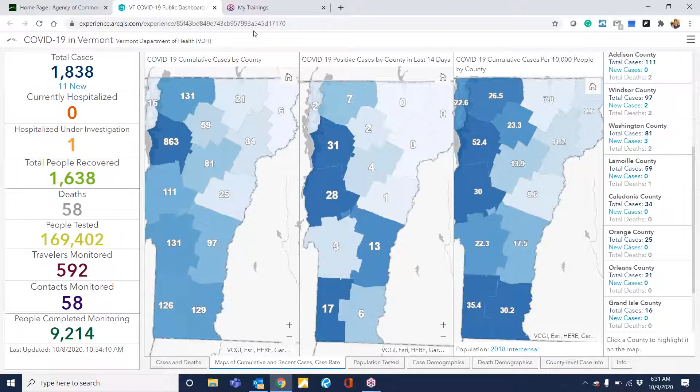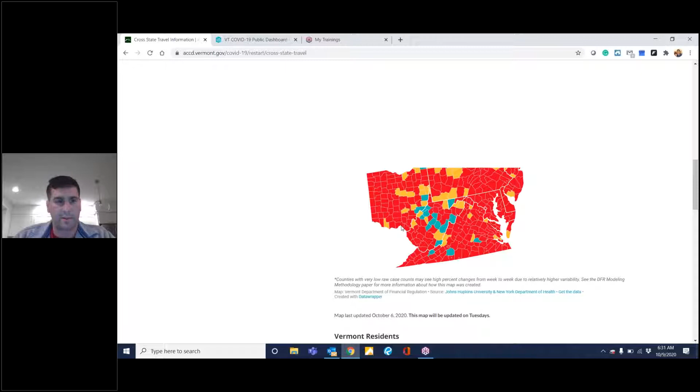The most up-to-date travel restrictions. This loads up real quick. There hasn't been a whole lot of new changes on Tuesday. Here's the map as it's loading up kind of slow. We'll move it over, but for the most part, regarding any leisurely travel coming up, please let your supervisor know so we are well coordinated and can have a quick discussion on expectations.

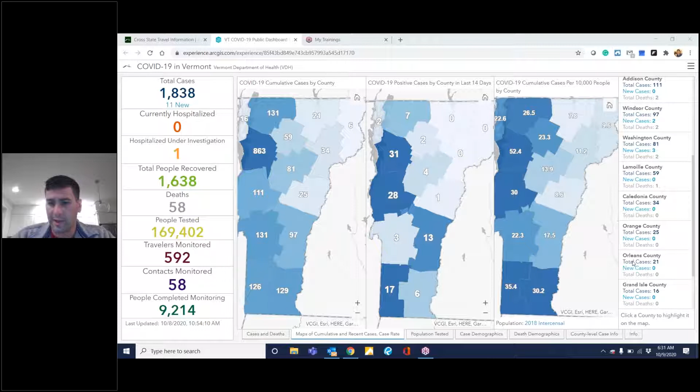So with that said, I'm going to pass it over to Ben McKinney. Ben McKinney will be presenting today on a very important topic that has a lot of exposure, and it definitely highlights that one of the main focuses for hazards that we have in construction is the struck-by hazard.

Thanks, Matt. Can you see it? Yes, we can. Great. So today's code of conduct item, or this week's, is speak and act supportively of ECI as a company and of our workers.

Safety news: 66 days without a recordable injury. About 30, 60, 80 days left. So we've got about 80 left in the year. It'd be great to get way up into the triple digits going into 2021. Let's keep at it. Today we're going to talk about bucket loader safety.

So loader facts at ECI: we own 16 bucket loaders. They range in operating weight from 12,000 to 38,000 pounds, on the small end a 304 and up into the larger end at a 644.

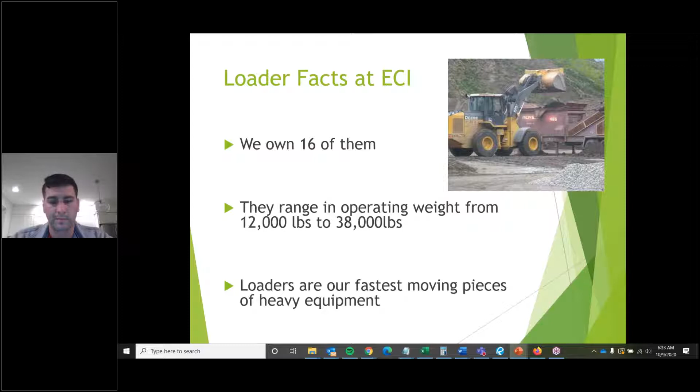Loaders are our fastest moving pieces of heavy equipment. So the safety risks primarily are falls, as in an operator fall entering and exiting the machine, actual tip over of the machine, and struck by, or maybe a caught-in-between type incident between the loader and other equipment or personnel on the ground. Inexperienced and unqualified employees often feel comfortable operating loaders more so than other equipment for some reason, and that can add to these risks.

Falls: entry and exit from a loader can be dangerous due to the height. That top platform in front of the door on a 624J is 5'6" off the ground. That's really high compared to most of our equipment, and for reference, when we're working just a little higher than that, we're required to tie off. So you can see where you could get really hurt from a fall from that top step. Actually one of our worst injuries over the last several years was just that. The door handle mounts to the tempered glass of the door, and that's what happened in this instance. That can fail—it shouldn't, and it's unlikely, but it can obviously happen.

So the safety measures to take are to always maintain 3 points of contact when entering and exiting the machine. Don't solely trust that handle on the glass. Always dismount facing the machine, and don't jump. Even the bottom step is nearly 2 feet off the ground, so make sure you have good purchase with that bottom foot before you just send it.

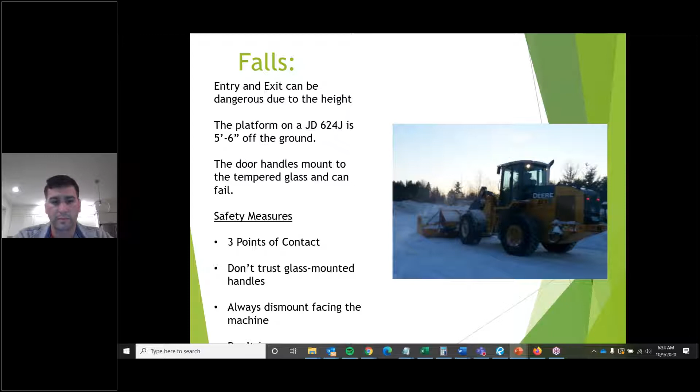Tip over: loaders have a very large lift capacity for their weight. These are really big machines, but 38,000 pounds in our world isn't all that heavy, though volume-wise they take up a ton of room. They're really tall, they're long, and they've got an impressive lift capacity given that relatively low weight. So what happens is when we take that big load in the bucket or on the forks and lift it up, it takes the center of gravity of the whole machine and brings that up.

You have the ability to create a very high center of gravity with a loader. And because they articulate when you turn and take that big load, you might have a 10,000 pound bucket of dirt. It's going to take that center of gravity and move it from right in between the four wheels, moving it out. That can make a tip over happen very quickly compared to when you're straight up and down or straight front to back with that load lower.

It also has pneumatic tires as opposed to tracks or even a loaded tire. These are softer and there are maintenance issues as far as inflation, and that can lead to instability as well.

So the safety measures: do not lift higher than necessary. If you're loading a truck and for some reason he can't get near the pile, don't drive across the parking lot with the load in the air, for lots of reasons, but stability is one of them. Use caution when turning with a load in the air. If you need to turn, it's better to keep that bucket close to the ground.

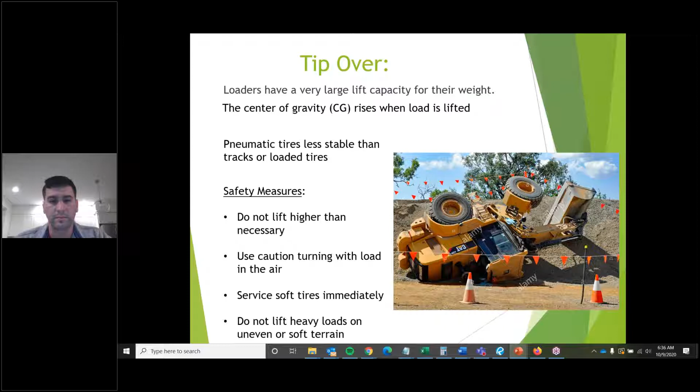If you don't have the parts and pieces, just reach out to Larry. We don't want to operate these things with soft tires. And don't lift heavy loads on soft or uneven terrain. A loader that might be very planted in a parking lot -- everything can change a lot with just a little bit of soft ground conditions and a little bit of unevenness.

Some of the loaders, with or without ride control, especially with forks, can get kind of bouncy. There's no need to go 24 if you can't do it safely. So the safety measures we need to take: travel with the forks close to the ground. I don't think a foot off the ground is too low, really. And if it's bouncing so much that you think they might scrape, slow down.

Use a spotter and check your blind spot. So if you're having a hard time, do a lower speed thing -- get a spotter when you're backing or trying to fork into something. And remember: GOAL, get out and look. That's really relevant here too.

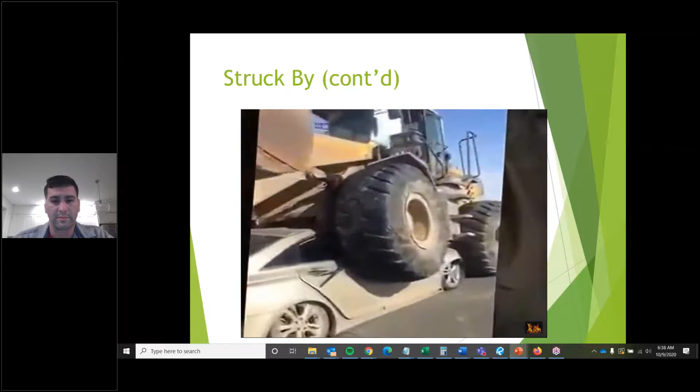Oh boy. I don't really know what was going on there. But, obviously not good.

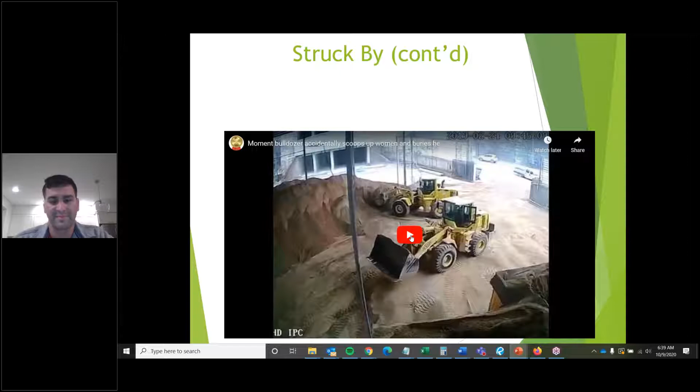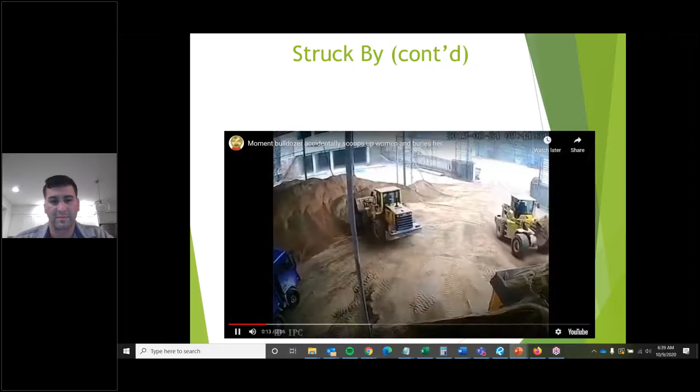Here's an incident where for some reason this person is where they should not be, and the loader operator doesn't see her because of that blind spot. Couldn't see her because of the bucket, and he goes in and grabs a scoop of sand and she's in there. I don't know what they're loading, maybe a screen.

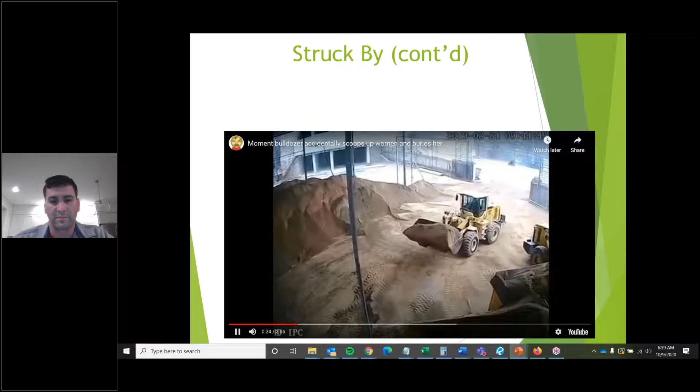There she is in the bucket and he puts her in the screen. She's fine - you can see later in the video she crawls out of the sand. But just a couple of dramatic illustrations there of what a struck-by can look like.

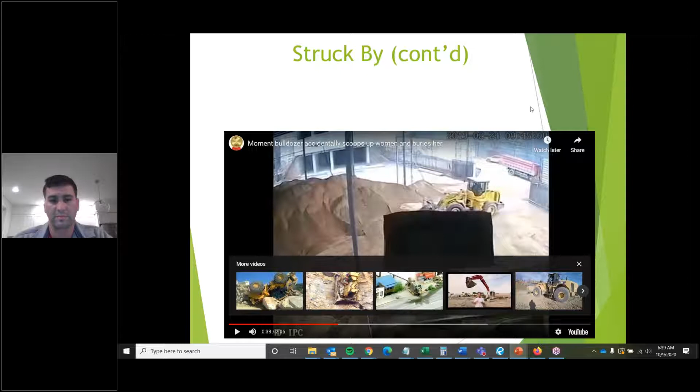Another incident we had this year was kind of due to that blind spot. We're just handling material and the operator couldn't really see what was going on right at the cutting edge of the bucket. He pulled forward a little bit and hit a rail, and that rail flopped over and caught somebody's foot in between.

That's probably a combination between that blind spot induced struck-by, and also that's an incident where the person had hopped in the machine and just decided to start running it. Highlighting the point that we really need to have qualifications and permission from the supervisor before we operate this equipment.

So we'd be remiss not to mention maintenance. Remember, keep those tires inflated, check oil, grease, just like anything else. I think we see a lot of people that are maybe better about checking oil and greasing excavators, and loaders sometimes get neglected - they need it just like everything else. And warm up, cool down, plug it in the winter. We also sent out a maintenance and operating tips email as well.

That's all I got. Ken, you want to take it from here? Sure will.

Okay, thank you, Ben. I especially think that one of the challenges that is underappreciated - we can all appreciate the blind spots and everything, but until you're really into it and driving around a sharp corner with traffic around you, that's when you realize how responsive, or over-responsive, the loader is when making a sharp turn like that, especially at higher speed.

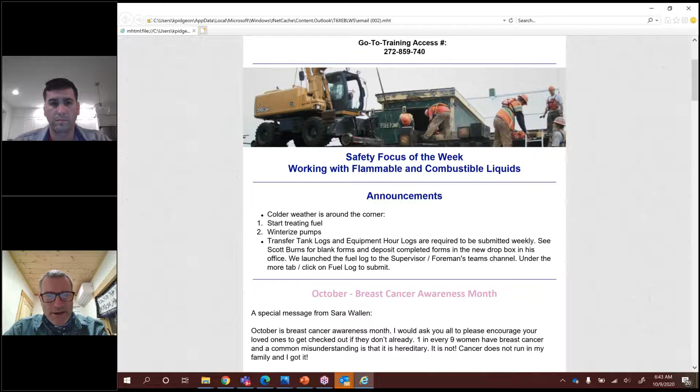But anyway, going on to announcements, nothing new around here. We're still looking at cold weather - start treating your fuel, winterize pumps. And then the transfer tank logs and equipment hour logs is something we want to keep on. We had Carter give us that presentation last week on how to do it on Teams, so if you didn't catch that, or didn't quite get how to do that on Teams, check with Carter or Matt, or maybe someone else who's already using it.

So October is Breast Cancer Awareness Month, and I got a pink ribbon here to express my awareness of it. I have a message here from Sara Wallen, and I'll read it on her behalf. She wants us to know that October is Breast Cancer Awareness Month, and she says, I would ask all of you to please encourage your loved ones to get checked out if they don't already. One in nine women have breast cancer, and a common misunderstanding is that it is hereditary. It is not - cancer does not run in Sarah's family, and she still got it.

So she really wants to emphasize that getting tested is extremely important. She said, I'd also like to thank everyone at ECI for all the support you guys have given me for the last 9 months. I feel so loved by everybody, and I couldn't have survived this without you. I can now call myself a survivor, she says, and much love by Sarah is this message. I also want to comment that today is Sarah's last radiation treatment.

So she's pretty excited about that. She'll be in, I think, later this morning. So if everyone sees her, or if you're around, just swing through and wear your pink ribbon or pink hard hat, whatever you got. So good. Well, congratulations, Sarah. We wish you the best and continued health.

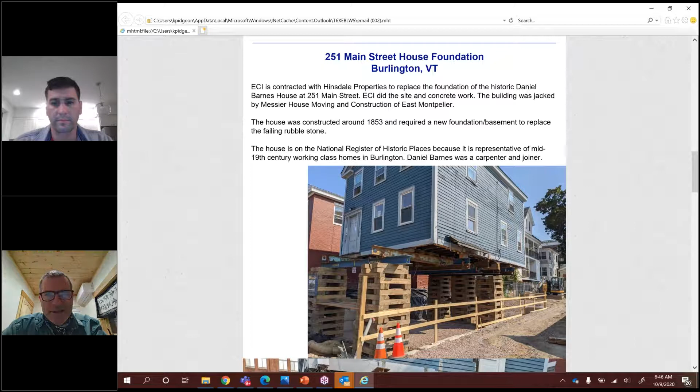So we did the site and concrete work. The building was jacked by Messier House Moving and Construction of East Montpelier. The house was constructed around 1853 and required a new foundation basement to replace the failing rubble stone. The house is on the National Register of Historic Places because it is representative of mid-19th century working class homes in Burlington. Daniel Barnes was a carpenter and a joiner.

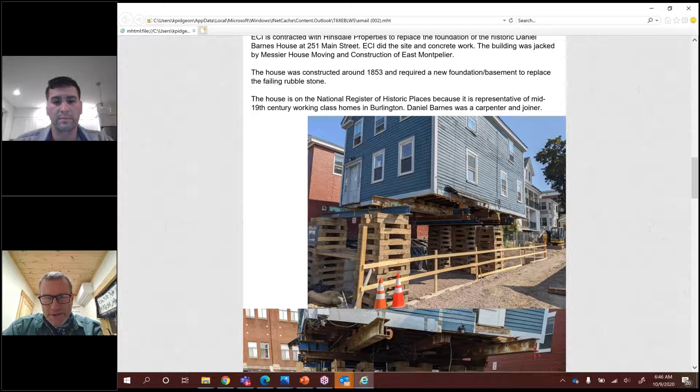Pretty cool, you can see how it was all jacked up and cribbed up by Messier. We did the excavation around it at this point and removed the old foundation at the point of this photo. Then we formed and did some footings around the perimeter and interior, and poured the wall.

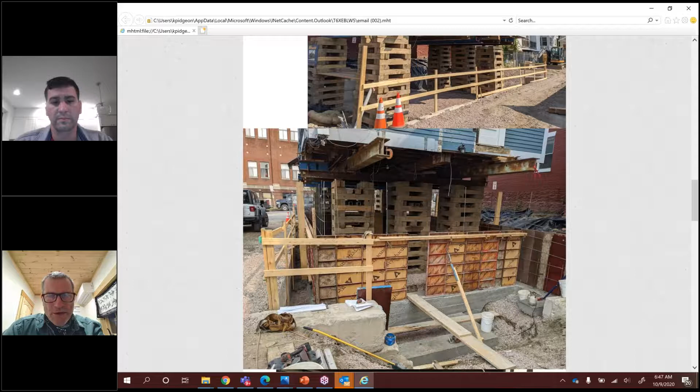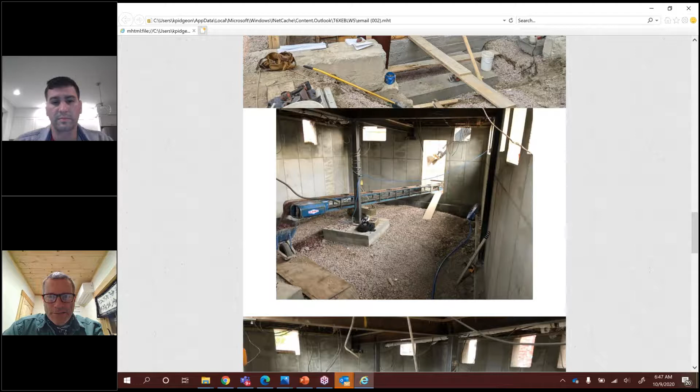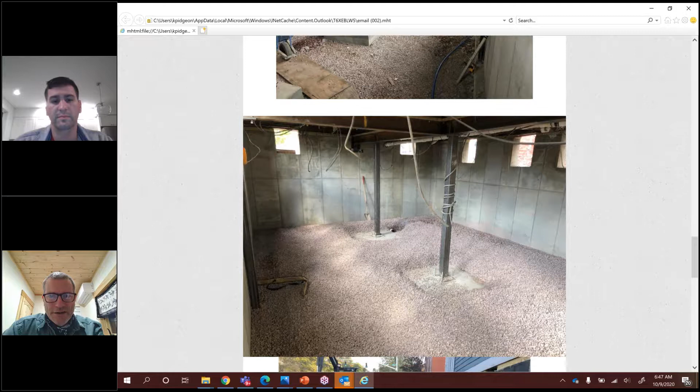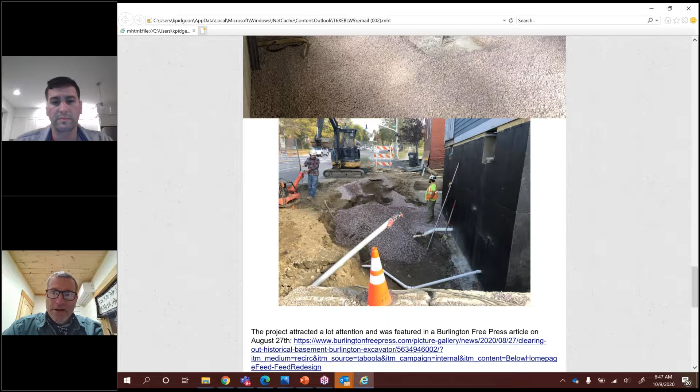It's right on Main Street. It was an awkward looking thing standing up in the sky like that. So then after the walls were installed, our guys used a conveyor to get crushed stone in there to prep for the floor slab. There we go, with a couple column footings in the middle of the building. Not a very large footprint here. And then looks like some sewer or other utilities going in, or going out for the sewer, I hope. Just note that the project attracted a lot of attention.

It was featured in a Burlington Free Press article, or more like a photo expose, on August 27th. I've given a link, and there's a lot of great pictures of the project and ECI working.

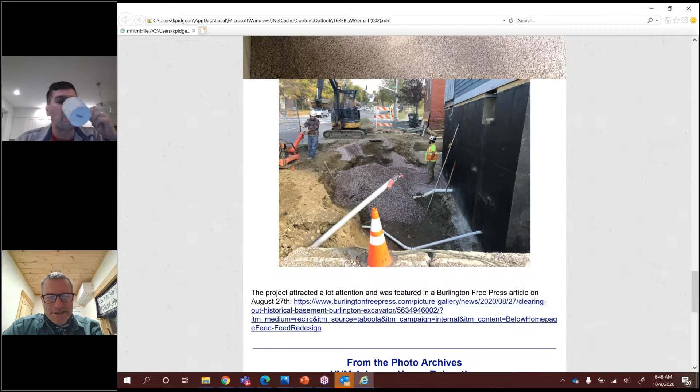That was 2005, and this was before the Davis Center was constructed. It was all part of that work prior to the Davis Center, and it was located moving from the north side to the south side of Williston Road. It was quite an awkward looking thing to have a house jacked up and moving across the road in that case. So that's what I got.